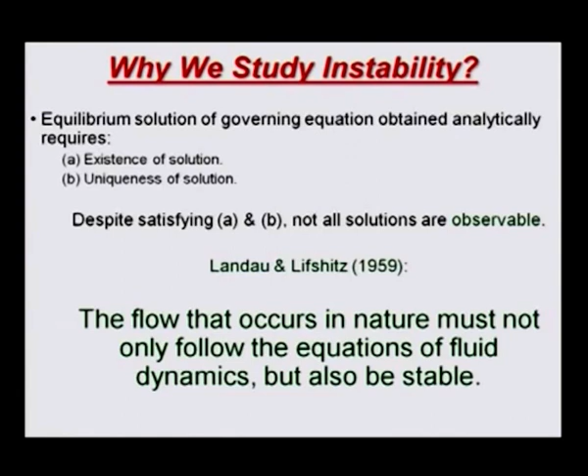So this was the nonlinear aspect, which was later found out when linear stability theory was developed, that pipe flow indeed remains stable to linear growth of disturbance modes. So that is also true for Couette flow, that Couette flow and pipe flow remain stable for all Reynolds numbers.

There is somewhat of a difference you see in channel flow, or what is called Poiseuille flow. This shows instability in the linear mode, but the critical Reynolds number predicted by linear theory is about 5772, whereas people have done experiments. For example, this paper by Davies and White shows that flow becomes unstable at a Reynolds number as low as 1000. So this should also be cited as a failure of the linear theory. This is one thing that we must understand.

We must also point out that the basic solution, which we call the equilibrium solution, departs from its equilibrium state to another state because of instability due to disturbance. It is important that we know what are the disturbances that trigger those instabilities, and that is what is studied in receptivity. So this is what we studied yesterday.

So let us now talk about receptivity a little bit more. As I mentioned, in receptivity studies you look at the problem as one of a dynamical system, and you find out what are the inputs that trigger the dynamical system to give you those growing disturbances in the output stage.

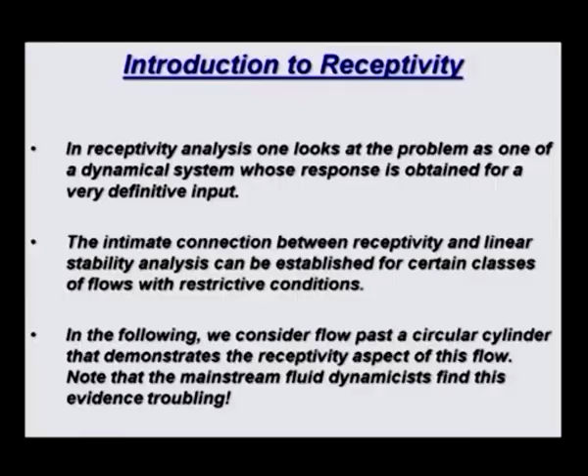I want to show you one aspect of receptivity in the context of flow past a circular cylinder, and this is a rather interesting example. We did this experiment here itself a few years ago. We have a very noisy tunnel, and we wanted to characterize the noise and what happens. So what we did was set up a simple experiment, flow past a cylinder.

We kept the Reynolds number fixed by considering two different cylinders of different diameter, so that we change the speed to get the same Reynolds number. So if you keep the Reynolds number the same and do the experiment in the same tunnel, what do you see? You see this, and that is what I say many fluid dynamicists would find troubling, because we keep teaching in basic fluid mechanics that if the similarity parameter, the Reynolds number, is kept the same, the flow should behave the same, and here is an example where the flow does not remain the same.

In both cases, the Reynolds number is kept at 53. For this, we have used a 5 millimeter diameter cylinder, and the speed in the wind tunnel is kept at 17 centimeters per second, which gives a Reynolds number of 53. In this case, we take a thinner cylinder of diameter 1.8 mm, and the speed is raised to about 47 centimeters per second. So what happens? Why are these two flows so different? We are working in the same tunnel, using the same similarity parameter of Reynolds number.

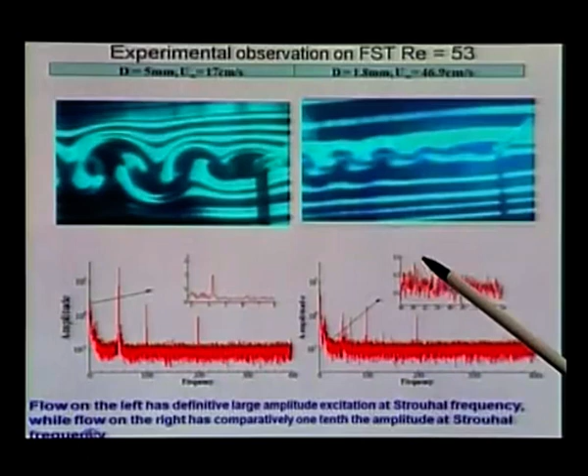This is of the order of about 3 on the left hand side. So this value is roughly about 2 here, while this value is about 0.25 or so, 0.25, 0.27 in that range. So you can very clearly understand that what you are seeing is a very clear demonstration of receptivity of flow.

In fact, this led Morkovin to write the following in 1991, exactly 108 years after Reynolds' famous pipe flow experiments. He said that Reynolds demonstrated turbulence in a circular pipe, and even today, as of that day, or I could say even today, 2010, almost 20 years down the line, we still do not understand the nature of turbulence that you see in a pipe flow.

How flow becomes fluctuating near the wall, and you see those eddies outside the near wall position, we have no mechanism to explain. This is something interesting, because as I told you, Reynolds number can vary from 2000 to 100,000, and you could keep the flow laminar.

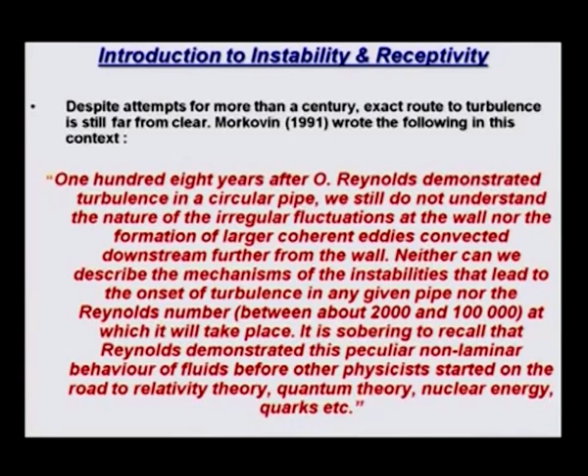So that is what it is, and this is a kind of advice, that it is sobering to recall that Reynolds demonstrated this non-laminar behavior of fluid before other physicists started on the road to relativity theory, quantum theory, etc. We have made so much progress in those areas of physics, but when it comes to explaining turbulence, we are not very much comfortable even today. So I think we should keep this in mind. This is basically a portrait, as Morkovin called it.

This is taken from Morkovin's paper of 1991. He says that this is what you have: the basic flow, the equilibrium flow, that will determine the transfer function, and then you could have disturbances. These two blocks are disturbances. Disturbances can be of two kinds.

One kind of disturbance could be near the surface. I will send the slides to you so you could take a look at it more clearly. These surface disturbances, meaning disturbances within the shear layer, could be time dependent or time independent. In this paper these are called AC and DC, meaning unsteady and steady disturbances. You can have different types of disturbances inside the shear layer, or you could have disturbance outside the shear layer, which is called the outer disturbances.

Those outer disturbances also could be steady or unsteady, and that could affect the flow. This aspect is related to receptivity, and the kind of scenario we see, either what is given by primary instability theories, whether by linearizing, parallelizing, or simply linearizing the Navier-Stokes equation and solving, or you could get the bypass route. So these are possible, and if you come from the primary instability side, you could have a secondary instability, a tertiary instability, and then you end up getting this.

This whole block, the bypass block, has been all written with a question mark. So in 1991, many of those mechanisms were considered unknown, but today, 20 years down the line, we did some studies in various parts of the world, and now we see that we can identify if we have a nonlinear mechanism affecting it, or non-parallel mechanisms, or if there are some unknown mechanisms. I must tell you that in this course we will show you some of those mechanisms. Today itself I will show you some visuals to explain that.

This is one thing we discussed earlier also, that instability and transition is not synonymous, they do not occur in the same place. You may have a transitional flow. For example, if you look at a flat plate in a flow with moderate disturbance, where the turbulent intensity is less than 0.5%. What is turbulent intensity?

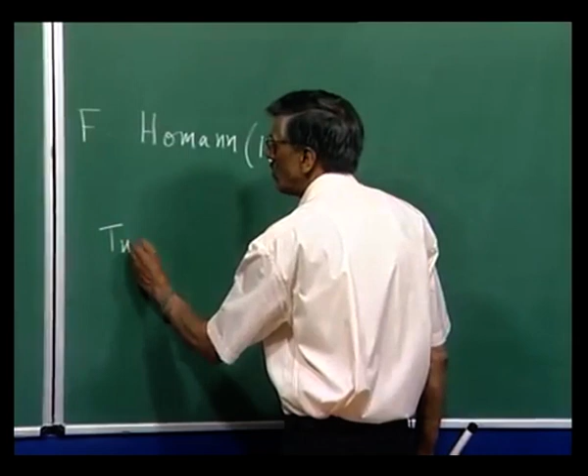Turbulent intensity is defined as the following: if you have a uniform flow u infinity and then you measure the disturbance quantities, u prime, v prime, w prime, you look at that, and that is your turbulent intensity. So it is basically a non-dimensional RMS fluctuation of the flow field.

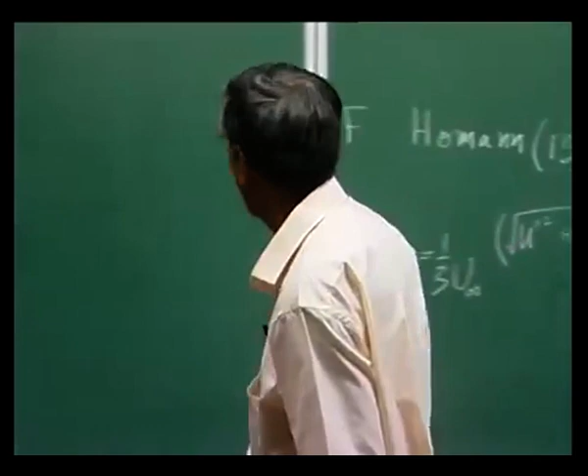So if you keep that turbulent intensity less than 0.5%, meaning 0.005 or lower, then transition occurs at a distance x from the leading edge, given by a Reynolds number of about 350,000 to 1,000,000. Whereas onset of instability is predicted at a Re critical of 519 based on displacement thickness. This value is rather critical.

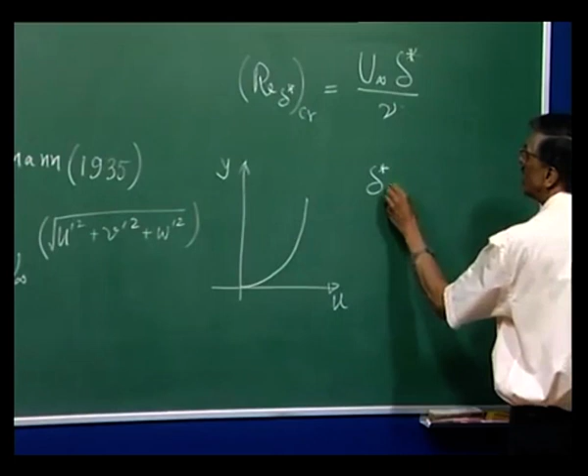So basically the Re critical we are talking about is based on displacement thickness. We will define what displacement thickness is later if necessary. If I have a flow field, if I get the boundary layer growing like this, u as a function of y, then I can get delta star as what? For incompressible flow, I will integrate 1 minus u by u infinity dy, from 0 to infinity. That is your displacement thickness.

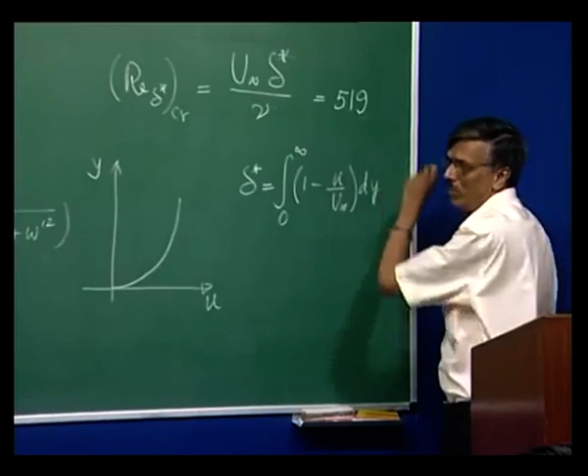If I use that, Re critical for a flat plate is actually 519.2, to be precise. So this is a very well defined value for a flat plate. Flat plate, what do you mean by flat plate flow? This is a flow with zero pressure gradient, like what you get from Blasius's profile.

So if you look at that, that value is definitive, whereas transition can occur—it could be a variable thing. It could be between 350,000 and 1,000,000. This means, as we also showed in yesterday's class, where we plotted Re versus Cf, if you recall, we had this.

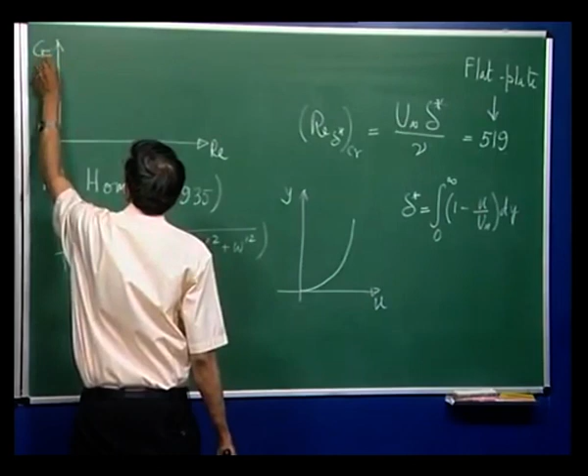This is the laminar branch of the solution, this is the fully turbulent branch of the solution. Depending on disturbances, you could go like this or like this, and so on and so forth. So that is why I will call this Re transition, and this I will call Re critical.

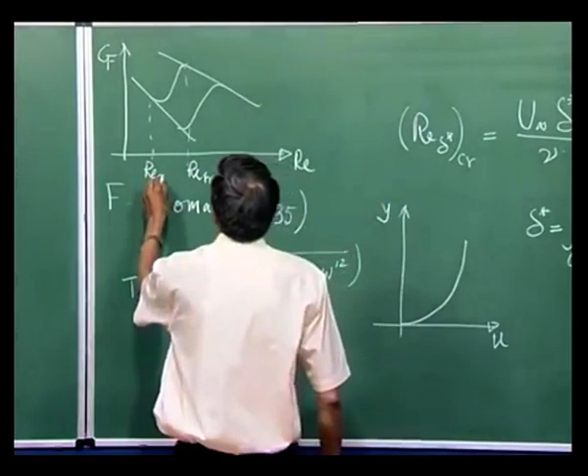But this disturbance level itself can be a function of the particular experimental device. So this Re transition that we are talking about here is experimental, and this is what we are defining here, this is theoretical. This is like your transfer function telling you that the flow is ready. If Re delta star is 520, the flow is ready to become critical. If you provide the disturbance, it should show the signature of those disturbances.

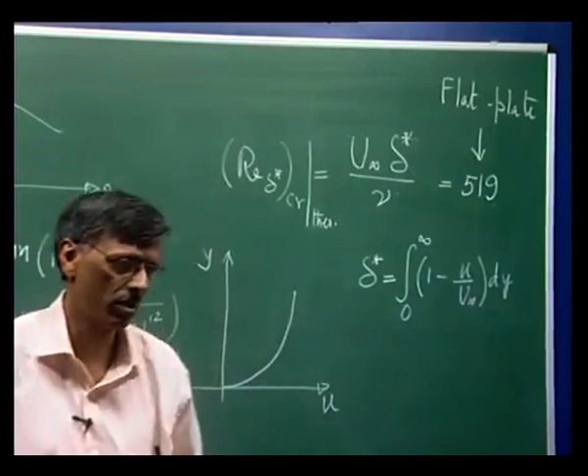So what we do is we actually should also understand that we are still unable to bridge the gap in our understanding between the difference of origin and the nature of turbulence. Everybody hopes, everybody hoped and continues to hope that if you can somehow solve the full Navier-Stokes equation, you will get the insight to the story. This is a matter of hope, you know.

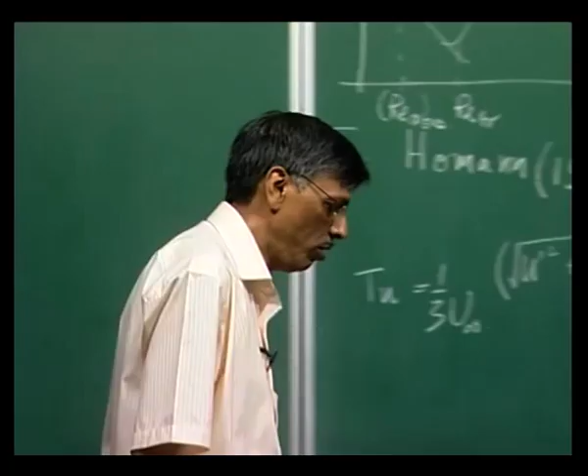However, I would like to, or we should point out that unlike in mathematical closed form solution, numerical solution is always contaminated by noise. So whatever we are saying here, the variability of the transition point and the criticality depending on disturbance, that also may affect your Navier-Stokes solution, right. So this is something we should keep in mind.

And that is what is being said next, that when we are doing this simulation of Navier-Stokes equation without any modeling, so we are solving the full Navier-Stokes equation without any models, that is what is called as direct numerical simulation, or DNS. So in DNS...

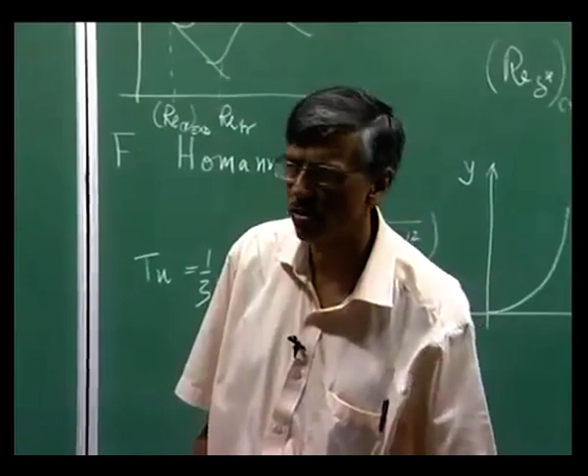People hope there is an implicit assumption that all kinds of noises that you have, numerical noises, the errors - we talked about round off error, we can talk about truncation error, we can talk about various other sources of error - they all will trigger the flow to a turbulent state that is the same as physical turbulence. And let me tell you very categorically, this assumption has not been shown unequivocally to be correct. So this is more like a hope or belief, it has not been proven yet.

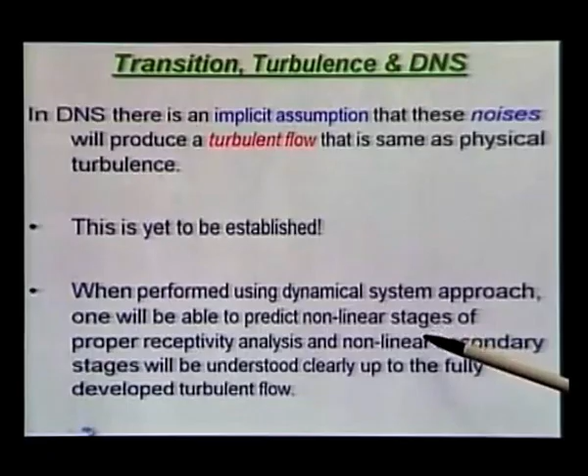When we actually solve Navier-Stokes equation using dynamical system approach, we can still study, for the given background disturbance, numerical disturbance level, we can study the linear stage, the nonlinear stage, we can perform all that. In fact, we will see some such results during the course of AE 625. So this is what we could do.

I will show you now something that I want you to see. So this is the simulation, this is the simulation of the flow. Now what you are seeing here is a flow over a flat plate, and there is some kind of an exciter somewhere here, and that exciter creates those so-called Tollmien-Schlichting waves. So those are somewhere here.

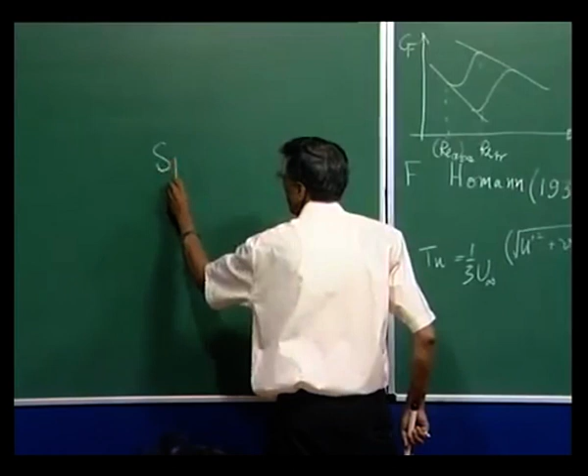So the TS waves are here, but what you notice ahead of those TS waves forming a wave packet, there is something much bigger than that. Let me use this word loosely - those disturbances which go at the front, they are like a tsunami kind of thing, they are only few in number, 3-4 peaks and valleys, and this is what we call a spatiotemporal wave front, because these quantities go like a wave front, and their growth rate is spectacular.

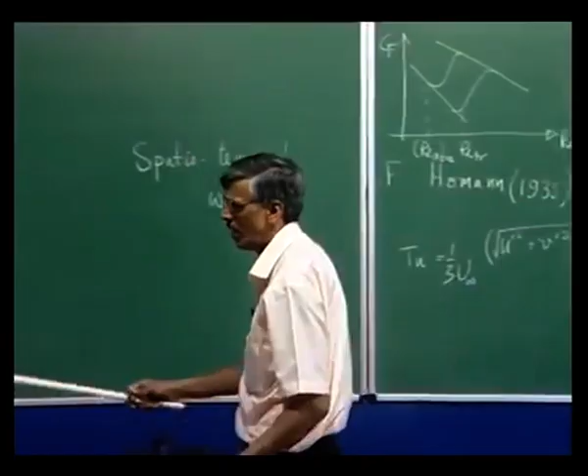These growth rates are significantly larger than what you see for the Tollmien-Schlichting wave. Actually, we performed this calculation in our lab. This is based on Navier-Stokes solution, but we also did a corresponding study using those linear parallel flow assumption theories, receptivity analysis, and we did show how this spatiotemporal wave front comes about. Even when the flow is shown to be linearly stable, multiple modes can interact, and this is what people have also talked about as the transient energy growth mechanism. And we have seen that this wave front can really go very, very high.

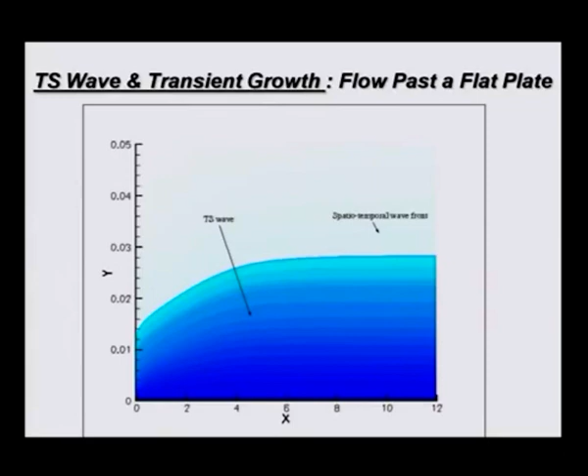Now what we could do is we could see similar such things. So this is what we did not show in the last picture, now you are seeing it. So this is your TS wave packet, and this is a spatiotemporal front, and you can see what I just said, that this wave front could be huge, and this is the kind of picture that you can get from a very high quality Navier-Stokes solution. So it is something we must keep in mind.

So here we are seeing simultaneously a few things that we have been talking about for the last few days: the TS waves and the spatiotemporal growing wave front. So if you want to call this, this is like a bypass event. If this amplitude grows very large, that can itself trigger the flow to go from laminar to turbulent state.

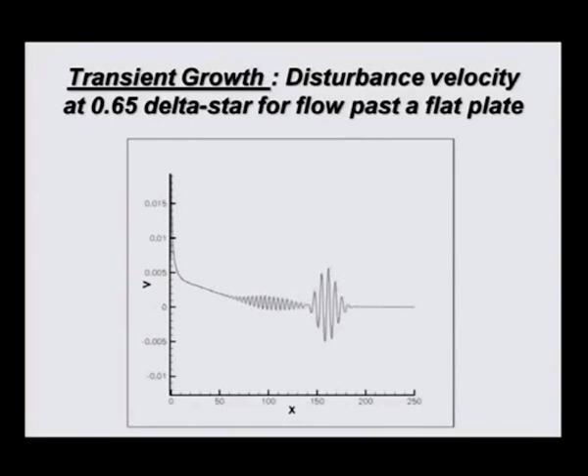So here the nonlinear effect would be significant, because amplitudes are far higher compared to the trailing TS waves. So this could also be an example of a bypass mechanism, which is what we talked about earlier. We are seeing some of those things. Let me now show you.

Yesterday you recall we saw that Honda aerofoil, and what we see is that if we perform the simulation for this flow going from right to left, this is the simulation for a Reynolds number of 10.3 million. This is the cruise Reynolds number for that Honda jet, and we can compute this without any models.

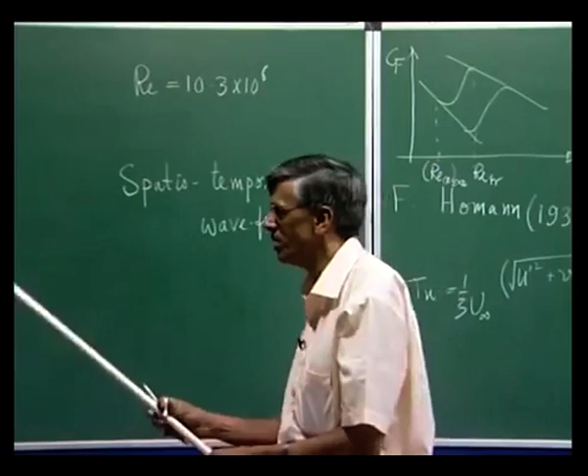We can do it, and this is at a 0 angle of attack, so the flow comes without any inclination. What you notice here is that the flow, the boundary layer, remains attached up to the middle of this aerofoil.

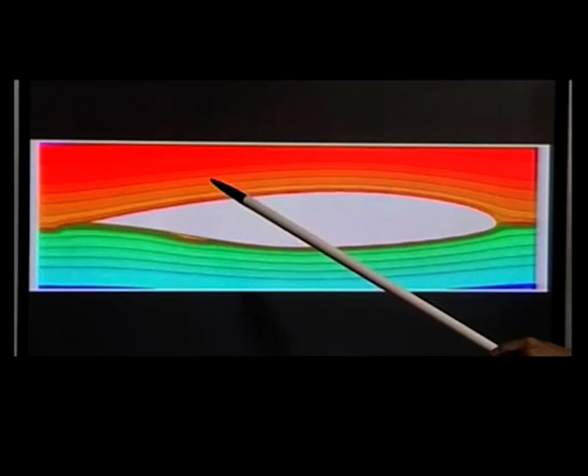Up to this part, flow is perfectly steady, but in the second half of the aerofoil, you are seeing some small separation bubbles, and they are unsteady. They keep moving, and you see the same thing on the bottom side also.

So what you are noticing is that you are not seeing any Tollmien-Schlichting wave, and if you calculate the drag of this aerofoil, it is significantly higher than what you get if the flow were to be completely laminar. So this is another mechanism.

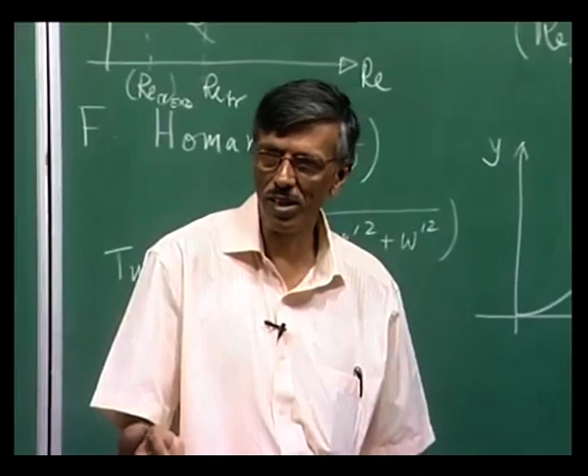This happens because up to this part flow experiences favorable pressure gradient, beyond this part flow experiences adverse pressure gradient. While in the favorable pressure gradient region the numerical noise does not do any harm, the same numerical noise shows this kind of attribute of a bypass mechanism. I will call this a bypass transition.

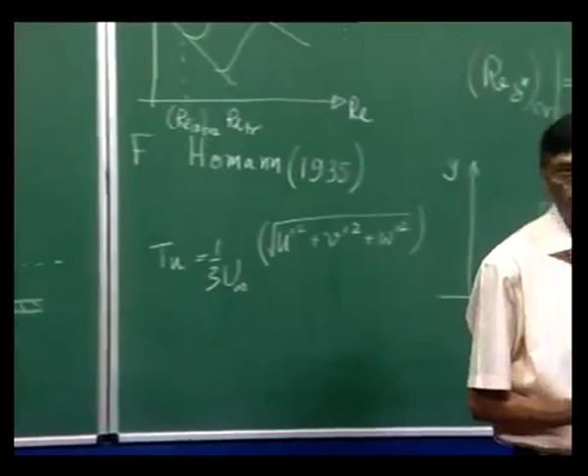We will also see in a later part of the course that we can have other kinds of vortex induced instability. If I have a flat plate flow, let us talk about a scenario like this: we have a flat plate. I would not show anything right now, but let us say this is the edge of the shear layer, and let us say we have a vortex convecting at a steady speed c, which is different from u infinity, the speed at which the flow goes from left to right over the plate, giving rise to this boundary layer.

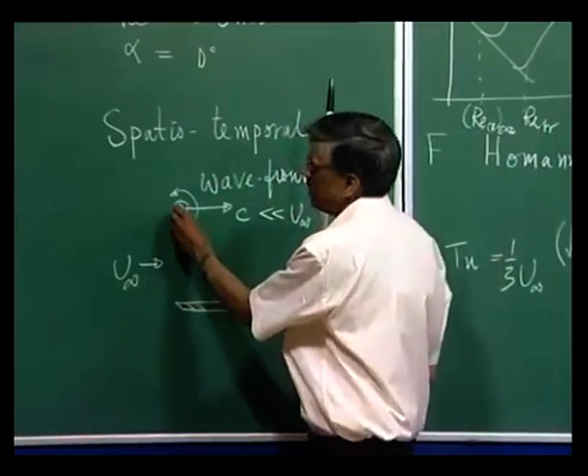If c is much smaller compared to u infinity, you would notice some kind of bubbles forming, and they also propagate like what you are seeing here on top. So this is what we call a vortex induced instability, because we have a definitive vortex there that is linking with this boundary layer, and this vortex actually destabilizes the shear layer. So this instability is called the vortex induced instability.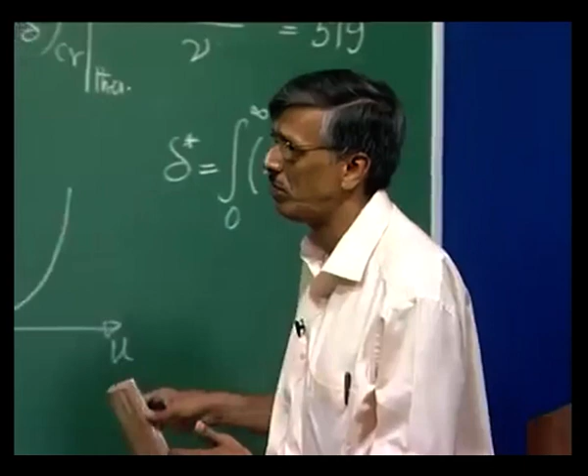So we have various mechanisms by which we can see this. Having given you this overview, let us now talk about a very specific case where we try to work out the details of what we mean by stability and instability.

I have drawn this example from something we can relate to: the stability of the atmosphere itself. How do we study this? Well, we study this in the following framework.

We have a still atmosphere, there is absolutely no motion. Then all the quantities, the properties of the atmosphere, are going to be a function of height, we know that. Then what happens is, if I identify, let us say we fix a datum here, and we fix an axis, z axis, perpendicular to this datum, and let us say this is at a height z.

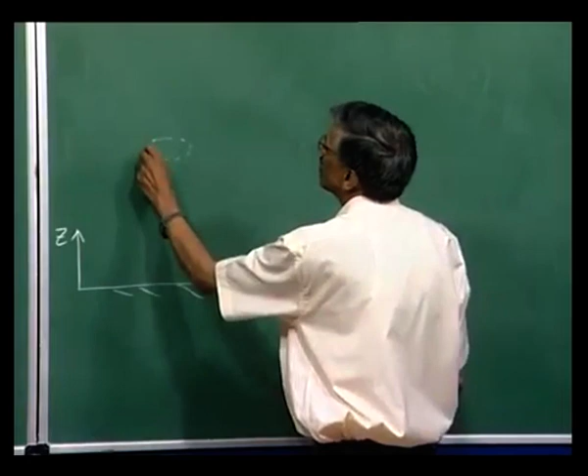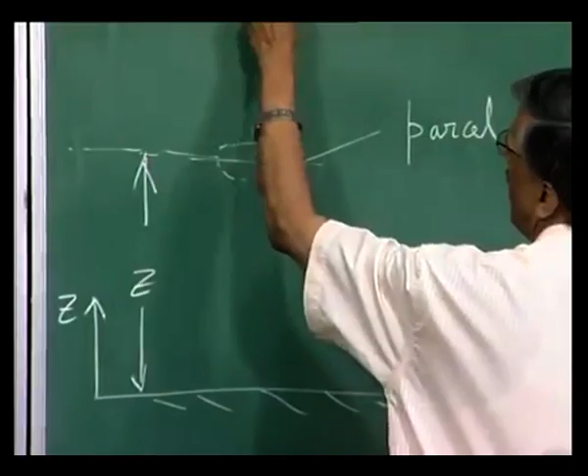What is this? This is a parcel of air. Say somehow we take a small sample of air and color it, so the properties remain the same as the ambience, so it is an equilibrium state. This parcel is there at an equilibrium state. Now what we do is we make this parcel go up to another height, and let us say this displacement is xi.

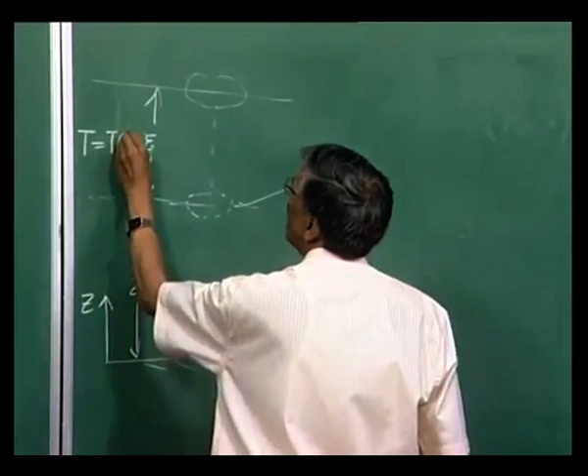Since the temperature here is changing, and we know what happens in the atmosphere, as we go up temperature falls. So let us say this T is a function of height z. When I have displaced this parcel to this height, what happens?

The air here that is carrying all the properties from here will be different from what is the condition out there, because of this temperature differential. So what would happen? The parcel will experience a force of buoyancy. Because of the temperature difference, there would be a density difference, and the density difference will cause the air to move.

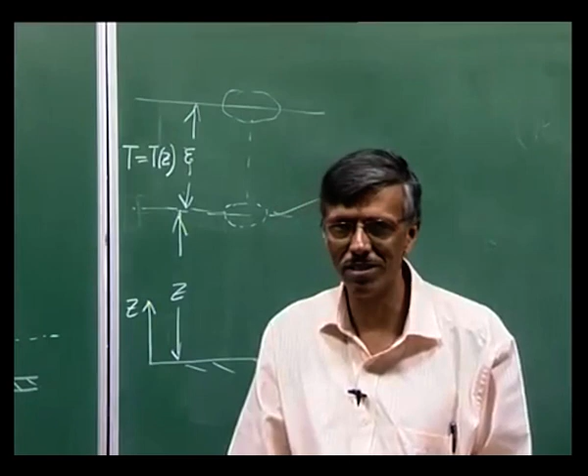So that is precisely what we are saying. Now, in the ensuing motion of the parcel, we want to see it as a dynamical event. What is the difference between a dynamical and a static event? You all know in your mechanics course, you have always talked about this famous example. What is this example?

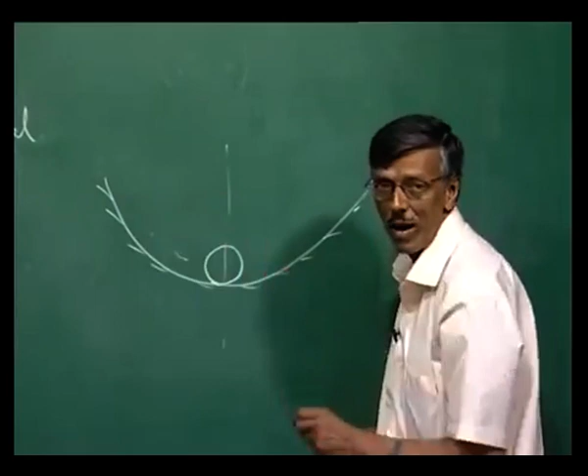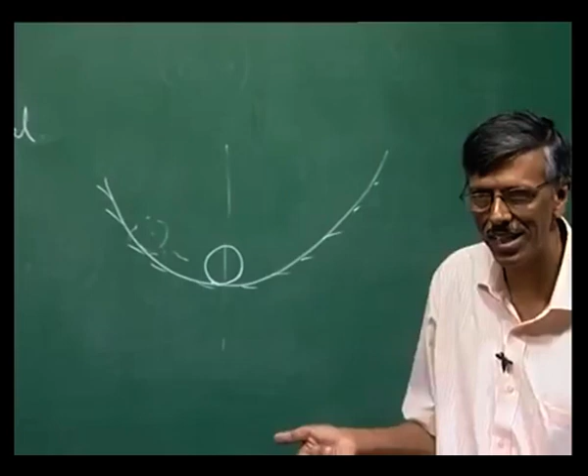You keep a ball here, and it is in an equilibrium state. Now if you move it up there, what happens? It comes back, and then we say it is stable. Why? Because in the disturbed position, it has the tendency to come back, but we do not study its time varying motion. Even if we do, we know that because of friction, its amplitude of oscillation will come down, and it will settle to the lowest point. What is the property of this lowest point? It is the lowest potential energy configuration. So the system wants to reside in the lowest energy configuration, as we all know from high school physics.

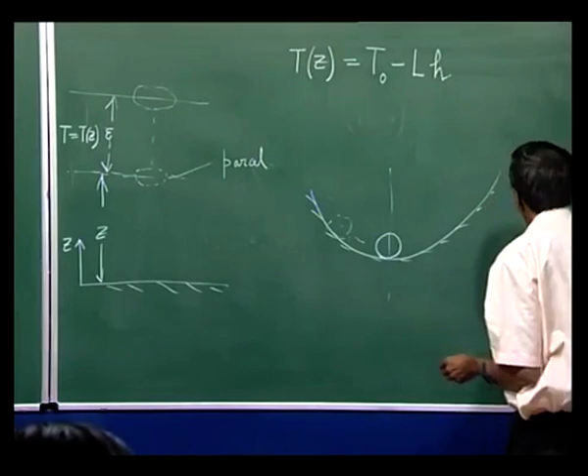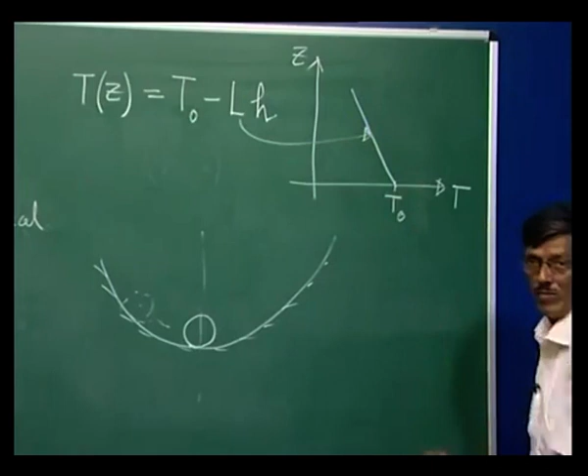So we can do a similar study actually, if I disturb it from here to here. Let us call this variation of temperature as given by T0 minus L h, that is, it is linearly falling. So basically what we are talking about, if I plot height versus T, it starts off with some value T0, and then it is falling off like this. The rate at which it is falling is given by L. So with unit height, the temperature falls by L. It starts off from a datum level T0 and falls off.

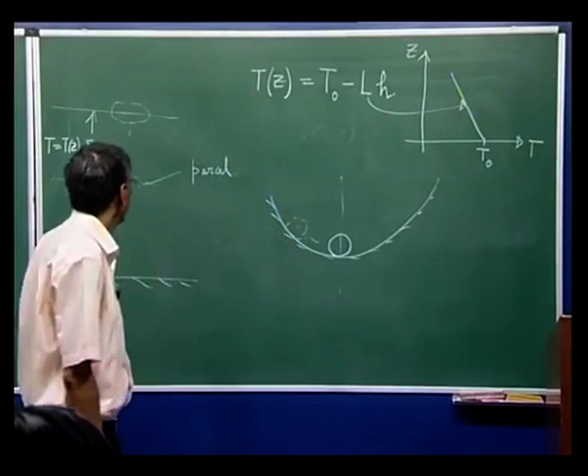We can study the instability. So what we could do is basically study its static stability. I will invite you to do that. What you could do is try to find out how the property varies with altitude. We will see what happens if I have displaced it from here to here, we will work it out. I will leave it as a reading assignment.

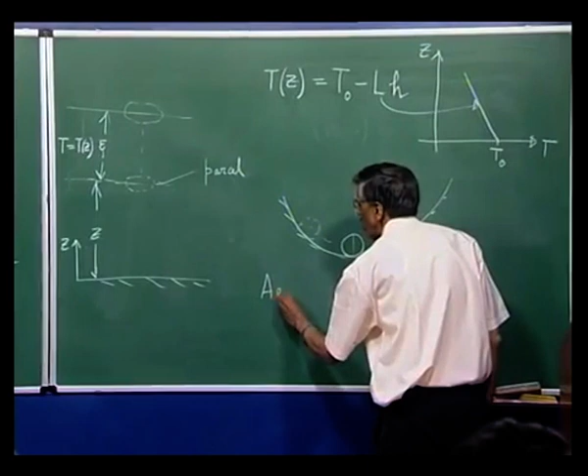You will find it in many books. Please do read the following reference, this book on aerodynamics by Houghton and Carpenter.

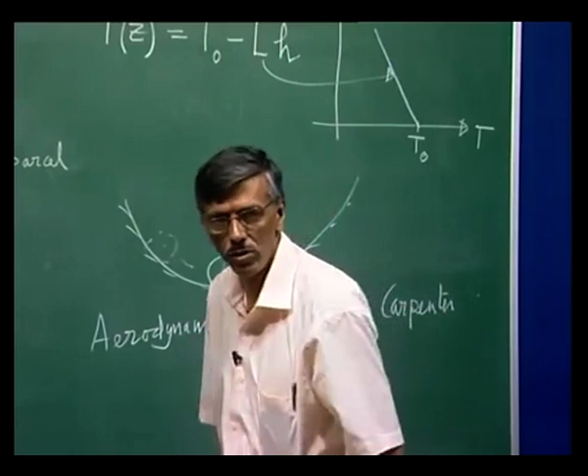And find out about static stability. So what are we going to find out? We are going to find out whether, in this displaced position of the packet, it has a tendency to come back here, or it has a tendency to go further up. If it has a tendency to come back to the basic equilibrium state, then we will call that statically stable. If it stays there and does not do anything, we will call it neutrally stable. But if it continues to float further up, then we will say it is statically unstable. We are not very interested in that.

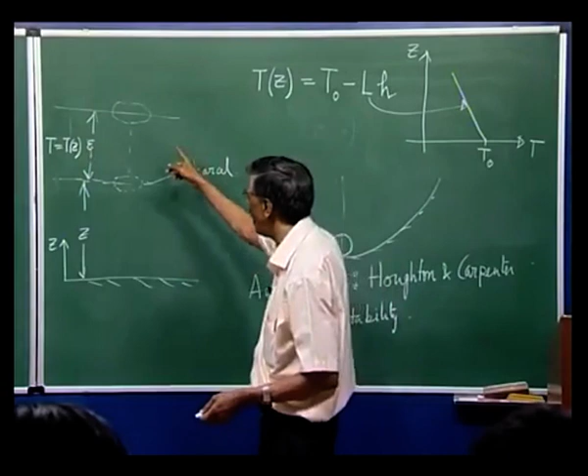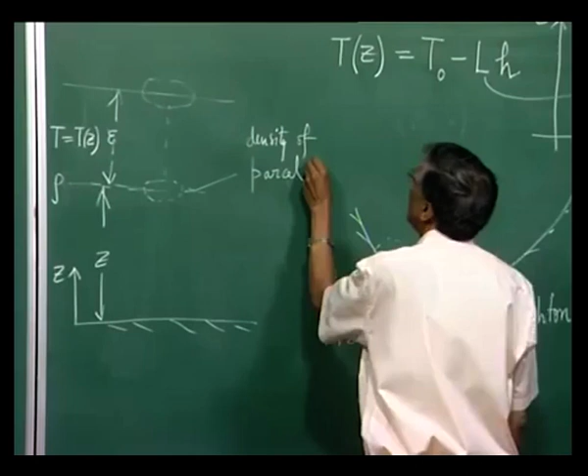So that you can study by yourself and find out. What we are studying here is the dynamic stability. That means if I identify this packet by, let us say, its density. So let us now talk about the properties. Let us say the ambient property is given by density rho as a function of height, whereas the density of the parcel, this I will call rho prime.

So if I now talk about a unit volume, then its mass is rho prime, and we have moved it vertically, and it is going to experience a vertical force due to buoyancy. So if I want to study its dynamics, I will write this down: mass times acceleration on the left hand side. And what is the buoyancy force? G times rho minus rho prime, and this is where we are trying to find it out, at the disturbed location. The disturbed location is z plus xi.

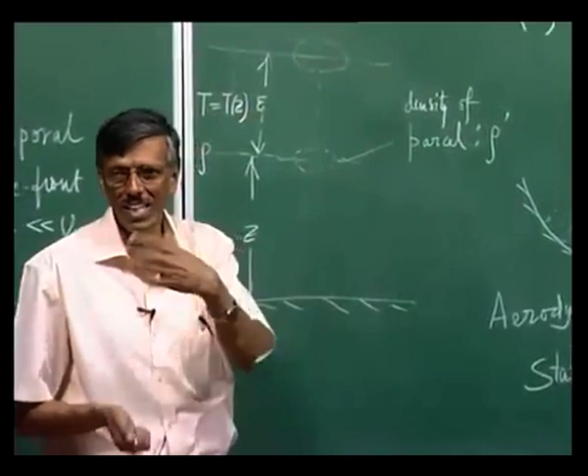Now we want to solve this equation and see the detailed motion, xi as a function of time. That is your dynamic stability. Whereas what we talked about as static stability is, in the disturbed position, we simply see its tendency, whether it can recover back or it goes further away or not. So that is the essential difference between static stability study and dynamic stability study. We are pursuing here a dynamic stability study.

Okay, now the density of the displaced air, as I told you, is given by rho prime, and the ambient fluid has this density rho.

So, what happens? The density of the ambient fluid at the elevated position can be written in terms of a series like this.

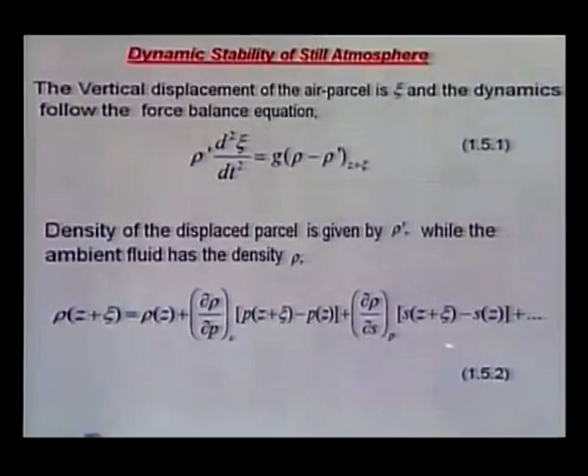Now, why did I write like that? That would require some understanding of thermodynamics. That part follows from equilibrium thermodynamics. If you all recall, you have all done thermodynamics, you may have forgotten, but it is time to flip your old books back and find out.

We are talking about the air parcel to be a simple compressible substance, meaning it is compressible. So, you can do work by either compressing or dilating it. That is the only mode of work we are talking about.

So, how many degrees of freedom do we have from thermodynamics? We would have 1 plus 1, meaning the possible modes of compressible work plus 1. In this case, the possible mode of work is 1. So, what I call the degree of freedom should be equal to 2.

What does this mean, degree of freedom? It means that any thermodynamic property can be written in terms of any two other thermodynamic properties. And that is what we had done in the previous slide.

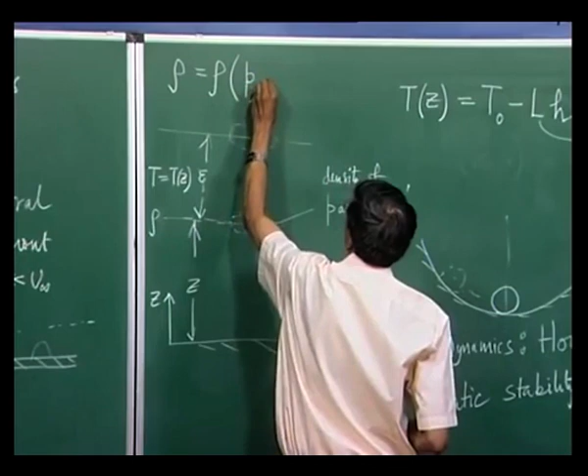In the previous slide, what we did, we said that we will write this density here as a function of two variables, and we are talking about these two variables as pressure and entropy. I have written the specific property, that is why I have written it in lower case.

So, what we find is that we will use these two as the independent variables. The independent variables are pressure and entropy. Then what we do is very easy.

I could see its variation of the density with height. I will say the density at the undisturbed position rho at z, plus how the density has changed due to the pressure variation. That is this part, del rho del p times delta p, and delta p is p at z plus xi minus p at z.

Same way I could also write the density gradient with respect to entropy and change in entropy. So, what has happened is I am looking at the ambient air, and this is how the density varies with height because of this thermodynamic description.

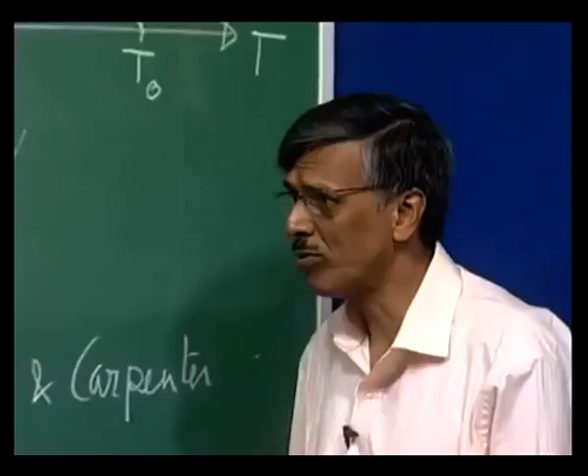Now, we also make a second assumption that when I move this parcel from this height to that height, I did it rather quickly. I did not allow the parcel to do some kind of heat exchange. So, that is a kind of adiabatic process, and if I do it reversibly, then I can call that adiabatic process isentropic. There might remain some kind of confusion if I say I did it very fast, that militates against our concept of reversibility.

In a reversible process, what do we say? That we do it very slowly, at every step we have an equilibrium, but let us not get into that debate. Let us just simply say that this displacement process of the air parcel is isentropic.

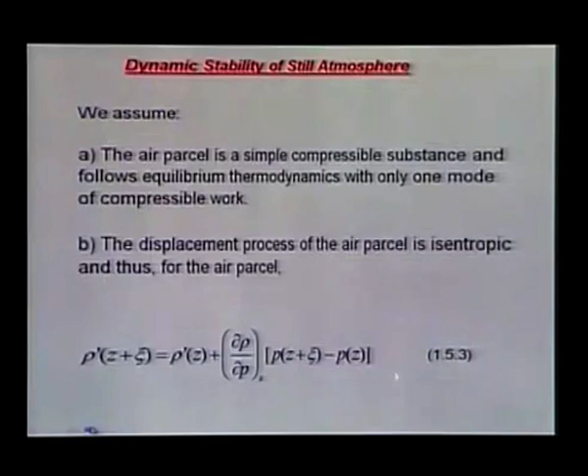Then what happens? I can also similarly write the variation of rho prime with height, but now, because it is an isentropic process, I have the second part missing, del rho del s times delta s. So, delta s is 0, so I will not have that.

So, that is what we have written here. Please make this correction, this is del rho prime del p.

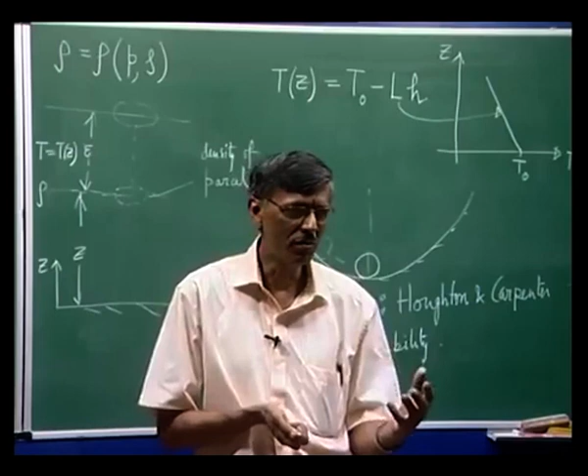But if I look at rho and rho prime to begin with, are they different? They are the same. That is why I did not write that rho prime there. So, the gradient of the parcel and the ambience are the same, because we have taken just the same thing, we have simply colored the parcel to identify its motion.

It is almost like flow visualization in a tunnel. You basically identify the same fluid, but just simply colored it. So, here also we are doing that experiment.

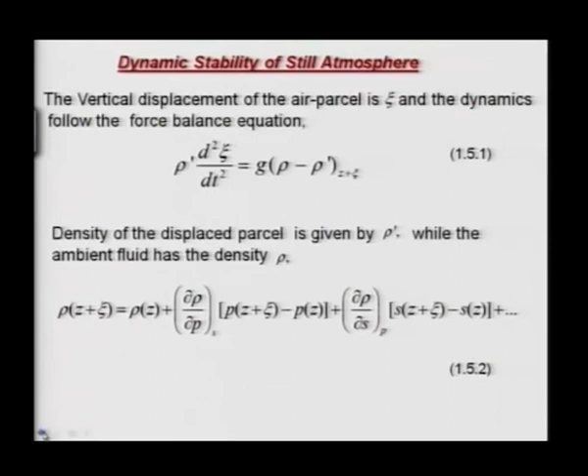So, you can see that this is the variation that we see here for the parcel, and in the previous transparency, in 1.5.2, we have seen the variation of density of the ambient air. So now, what we could do is we could calculate

the driving force that was proportional to rho minus rho prime into g. So, that is what we are doing at the displaced position. What is rho minus rho prime? That is given by this,

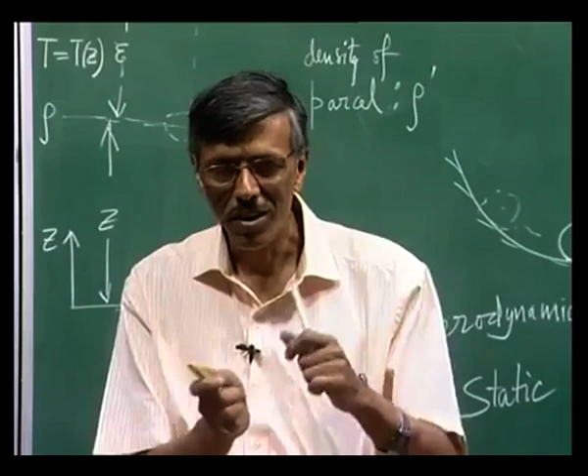the way the entropy changes with height for the ambient air, because that is what we are trying to study. We are not interested in studying a process, we are trying to study the substance.

See, the process is what? I have a parcel, I move it quickly, adiabatically, isentropically. That is understood, but we are saying the ambient air itself may have an entropy gradient, and that is what we have written down here.

Now you are seeing that the buoyancy force actually depends on this del rho del s into delta s, and that delta s itself I could write as ds dz times xi. That is it, it is a chain rule, that is what we have done.

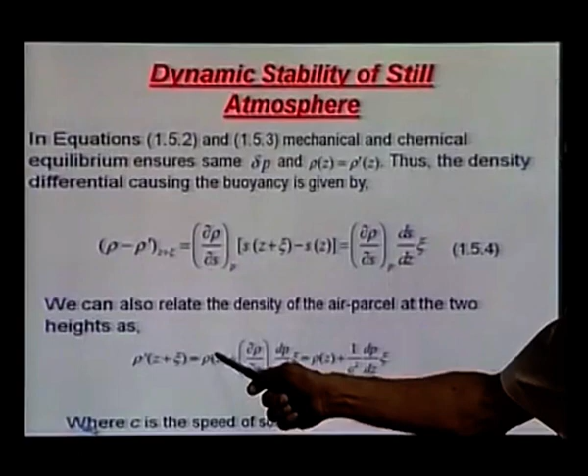Now what happens here? Earlier I wrote down the density gradient, this is going to be rho prime. Please understand that this is rho prime, but then at z both are same. That is why I wrote it as z itself.

Then what we have written here, del rho del p times delta p. Delta p again I can write as dp dz into change in height xi. So what happens? I can write it as rho of z plus del rho del p at constant entropy, which is 1 over c square. The speed of sound is defined like that, isn't it? So what I am saying is that the density at the elevated height is related to the density at the lower height, plus 1 over c square dp dz into xi.

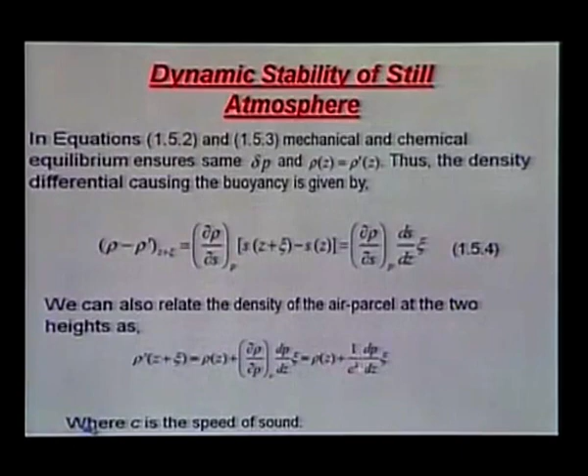Now having done this part, we could do some additional manipulation. For example, I have introduced the specific volume, which is nothing but the reciprocal of density. What is specific volume? Volume per unit mass, right. So that is your specific volume.

So what I get is, from my governing equation, was rho prime d2 xi dt square. Let me be very slow here for you to understand. So this was rho prime d2 xi dt square into the buoyancy force. So I brought that rho prime down here. So this is what I get. We have just now worked this quantity out, right. So then what do I get?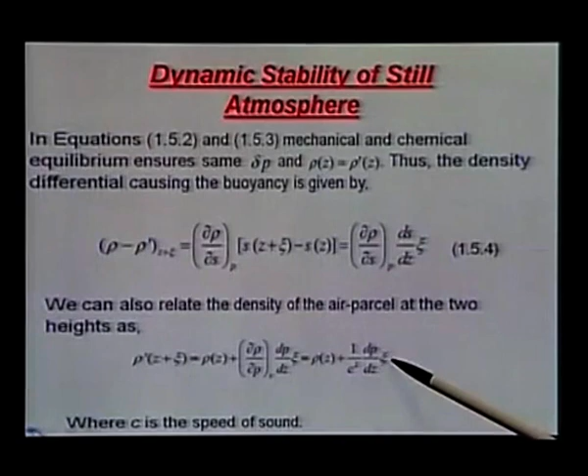Remember this is rho prime, and that is nothing but, if I see the previous transparency, I have worked it out as rho prime at z plus the lower expression. So if I write this as rho prime by rho, I will get 1 plus 1 upon rho c square dp dz xi. So this is going to be in the denominator of the governing equation. That is what we have done.

And what we found is the numerator was rho minus rho prime, that was given in terms of g into del rho del s into delta s, and that was given by this.

So now what we have done is some bit of simplification, because rho itself was 1 upon v. So del del s of 1 upon v is del del v of del v del s, divided by 1 upon v square, into minus sign comes, right. And because we have divided both sides by rho, that is why we again get g by. So this is what we get.

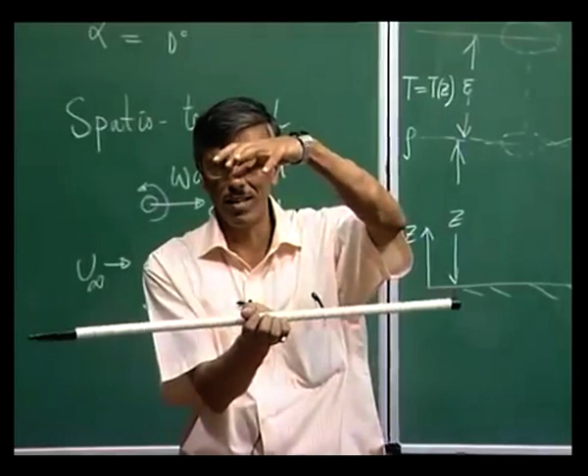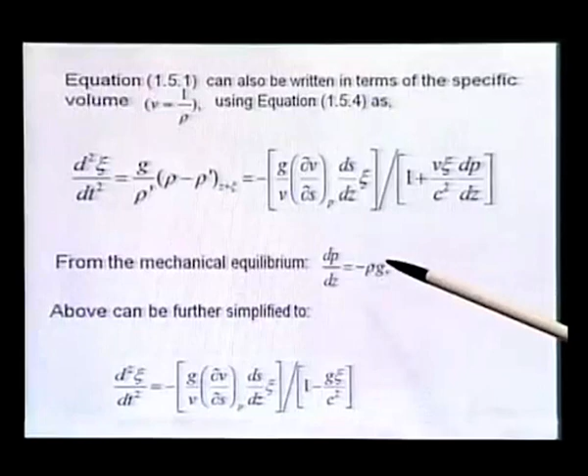Now if I look at the parcel itself, what about its mechanical equilibrium? I can consider a cylinder. On the lower side I have a pressure P, on the upper side I have P plus dp dz into delta z. So if I look at the equilibrium in the vertical direction, if the forces are balanced, then the weight of this column should be equal to the pressure gradient, and that is what we are getting. If this height is dz, delta p must equal rho g into dz. So that means dp dz is equal to minus rho g, right.

So what we have done then, we can go ahead and further simplify this, replace this dp dz by minus rho g here, and that is what you are seeing here. So that is what we are seeing there, that we could simplify that.

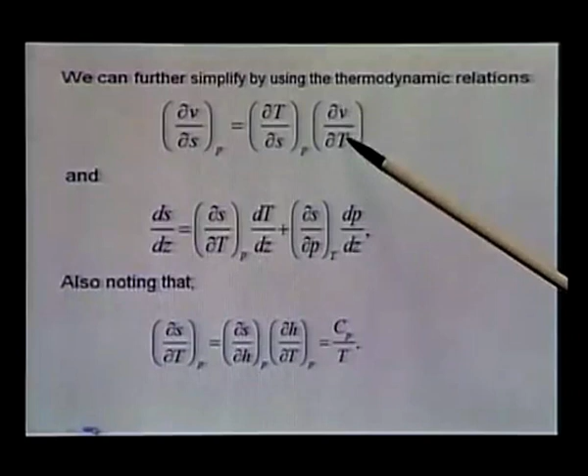Now there are lots of further simplifications possible. We want to write down the quantity in terms of measurable things. Measurable things are certainly not entropy, but specific volume could be measured, certainly not entropy. So what we do is we use various kinds of thermodynamic relations. We have this quantity in the numerator, del v del s at constant pressure, that we can write by the chain rule as del t del s times del v del t at the same pressure held constant. And we also have ds dz.

We could write entropy s in terms of two thermodynamic properties, let us write S as a function of T and P. If I do that, then dS should be equal to del S del T at constant P times dT plus del S del P at constant T times dP.

Now if I try to find out dS/dz, I will get this. In this quantity I have del S del T, which I could write as del S del H times del H del T at constant pressure.

H is what? Specific enthalpy. So H is Cp into T. So this quantity is Cp and this quantity is 1 upon T.

We are doing all the tricks learnt in equilibrium thermodynamics, simply manipulating, and we can also use Maxwell's relation. One of the relations tells you that del S del P at constant temperature should be equal to minus del V del T at constant pressure.

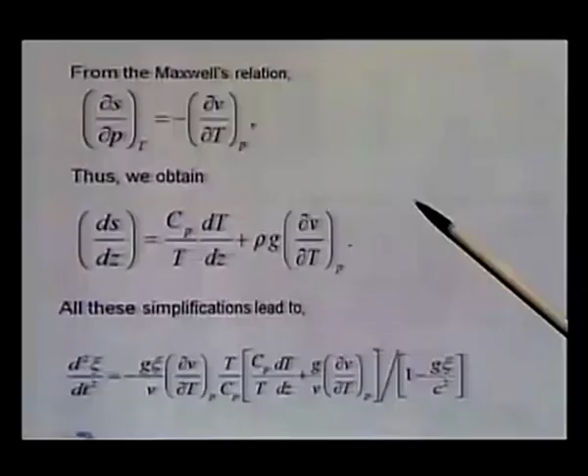This is something we can do in the lab. I can measure the pressure, temperature, and density. So this quantity is knowable, while the other is something you cannot measure in the lab experiment. Maxwell's relation gives you a tool to find this quantity in terms of quantities that can be measured.

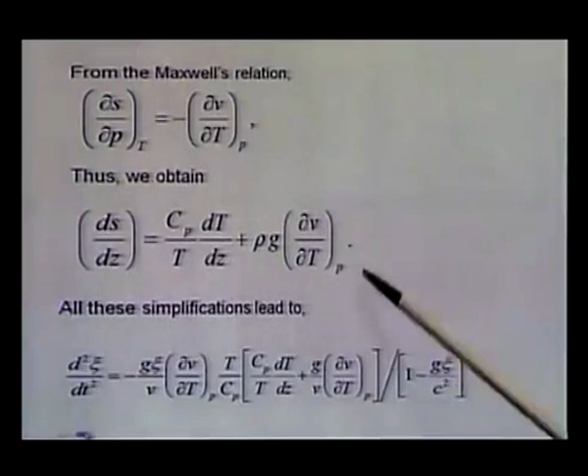So if I use that, I get dS/dz in this particular fashion. This is the simplification. We can substitute all of that in that relation, and this is what we get. So we are making progress, simplifying the quantities.

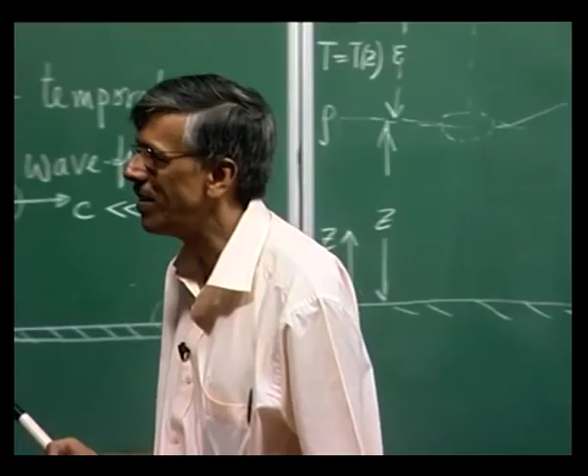So even if you are looking at the motion of a simple parcel of air, the dynamics is coming out to be quite interesting here.

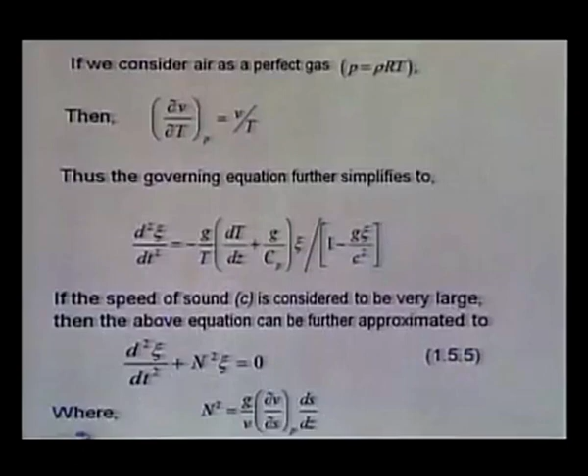Now we have made some progress. It looks like a simple harmonic motion, except this is not necessarily a constant. N square is given by this expression. This expression was done by two Scandinavian scientists, and this N square is called the Brunt-Vaisala, N is called the Brunt-Vaisala or buoyancy frequency.

Because it comes out in a simple harmonic motion as square, it has the dimension of a frequency. That is what you get for your simple harmonic motion of a pendulum or so. That is why N is called a frequency or the Brunt-Vaisala frequency.

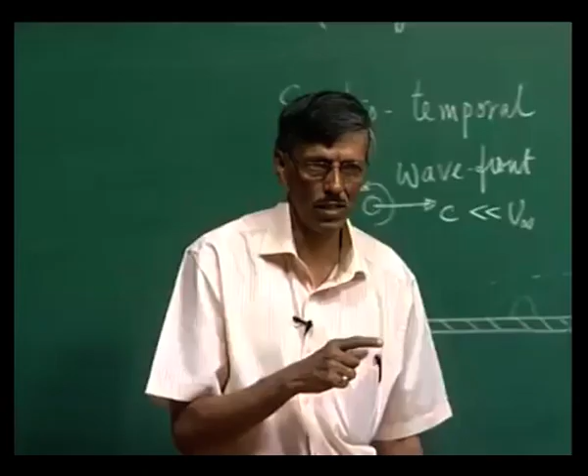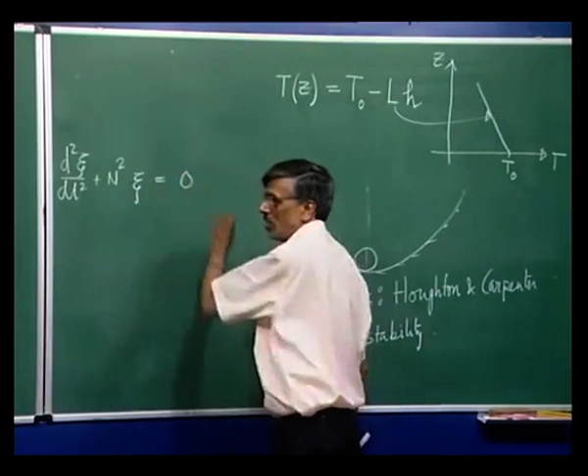Now, if you look at the previous expression, then what did we have? We have obtained the governing equation as simply this, d2 xi... and as we discussed, n is not strictly a constant.

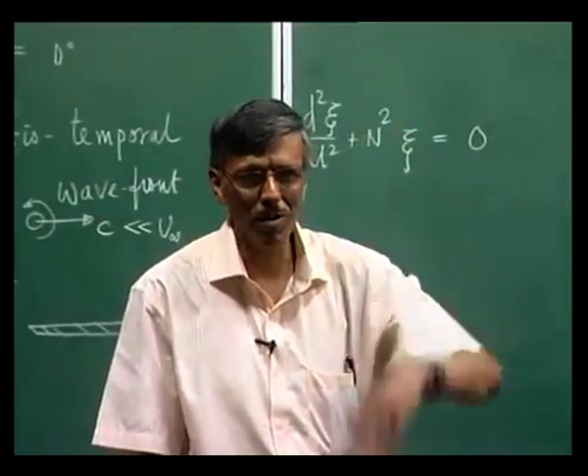So what happens is you can have the following possibilities. Suppose I am looking at different altitude in the atmosphere, I can locally measure n. Suppose it so happens that n square is positive, that is a very comfortable scenario. Then we will have a pure simple harmonic motion if n square is positive.

This will be a simple harmonic motion, and what kind of motion will that be? It will have the same amplitude, simple harmonic motion, so the amplitude does not change with time, it will be either sine or cosine, or a combination of the two. So what kind of stability will we be talking about if the amplitude does not grow? This xi is the displacement, it is a disturbance. So the displacement does not change with time, remains the same. That would be a neutral stability.

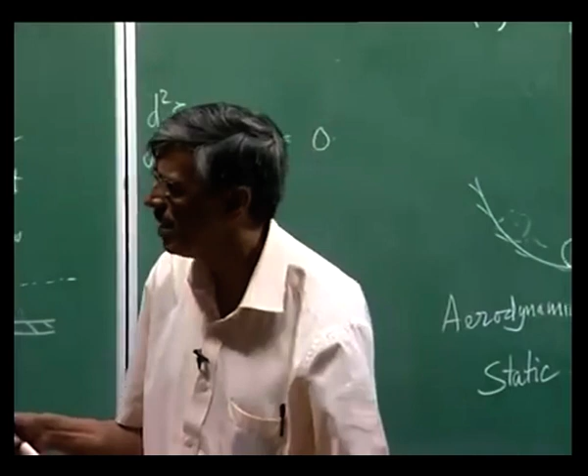All of you see that. If the amplitude grows with time, then we will be having instability. If the amplitude decays with time, we will have a stable condition. So what we are seeing is that if n square is greater than 0, then we will have a neutral stability of this static atmosphere. I think we will stop here.